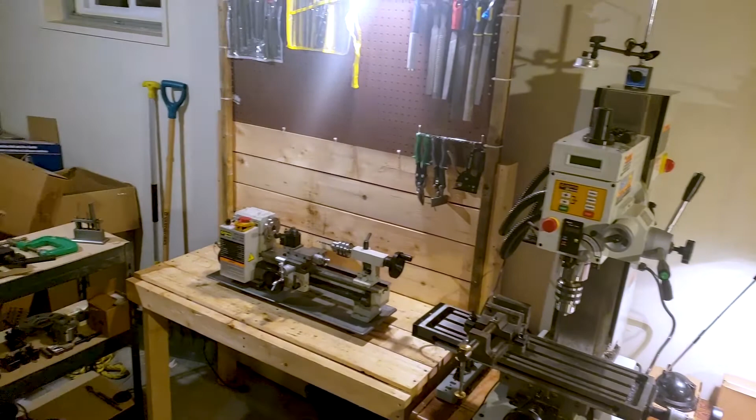Now just a quick overview of everything in the shop. As you can see, I have two milling machines, a lathe, some accessories on that bench there, and over here we have a soldering station, some miscellaneous tools, and my grinders and sanders as well as my vise.

Here we have my first milling machine, which is my Sherline mill. It is very small but also very accurate, and it has a very large selection of accessories for it, most of which are either on the table in front or in those plastic drawers.

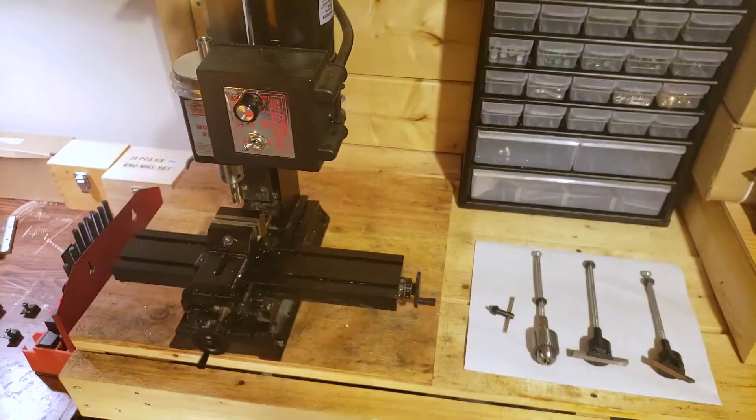A little closer up you can see it really is quite diminutive, but it is really quite amazing. Obviously the table can move both in the X and Y directions, and the spindle can move in the Z direction. You can see that cute little vise there, and you can probably tell how smooth the mechanisms on this are, and there's very little backlash. It has very good compensation.

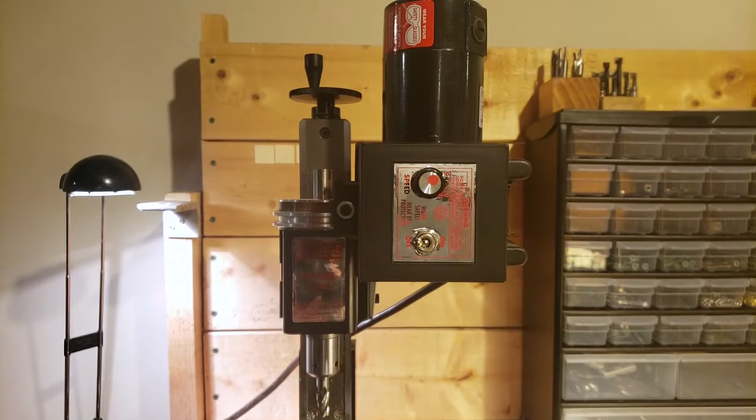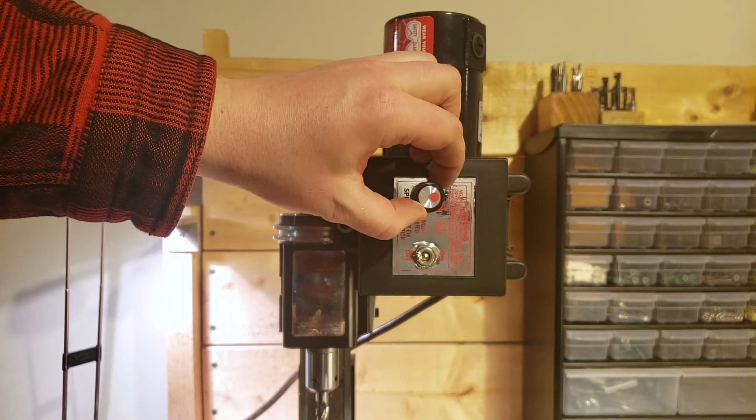Now as I pan up, you can see a closer look at the spindle, drive, and controller. Up there is where we have our Z-axis knob, and it's a little bit of an awkward placement, but given how small the machine is, it's not too bad. The motion is a little sticky on this one because I haven't lubricated it in a while. But as you can see, the controller is very simple, an on-off switch and a continuously variable speed.

Here we've got some of the accessories. You have a Jacobs chuck. That there is actually a gear cutter, which I haven't yet ground into shape yet. And on the far right, we have a fly cutter, which I actually use quite often, believe it or not.

Now we have our larger mill, our big boy. This one is slightly less accurate, or rather, I'm not as good at being accurate with it, but it is very large compared to the Sherline, and that gives it great vibration dampening. It also has a lot more horsepower, so it can make much deeper cuts, and it has a much larger capacity on the table.

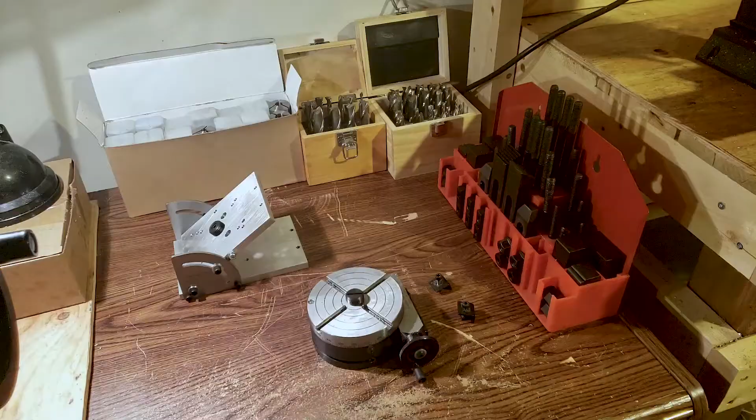Now, as you can see, there's quite a number of accessories with this machine. Over on the right, we have a hold-down kit, which is really quite useful, essential even. I'd say even more essential than a vise, as you can hold pretty much anything down with that. In the center here, we have a rotary table, which is actually intended for the Sherline mill, but you can make it fit on almost anything if you're willing.

Those are just the hold downs for it. And there's something I haven't used yet - it's an angle plate that's for the rotary table, but it's also for the Sherline.

I also have a large number of end mills, both 4-flute and 2-flute. They're very good quality, and right here I've got my collets, which is the primary thing I use to hold my end mills, as they are very accurate and repeatable.

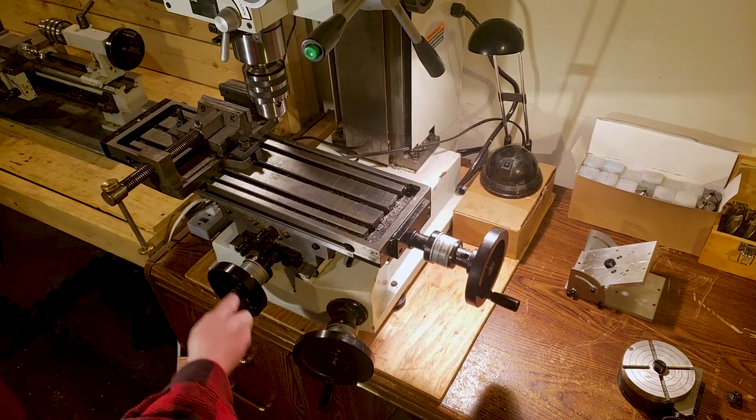Now onto the milling machine itself. As you can see, we have the Z-axis wheel in a very convenient location compared to the Sherline. Some of these larger mills do have the Z-axis wheel on top, but this one has it in a much better location. The X-axis wheel is also capable of freewheeling if necessary, which is useful because you can put an electronic drive on these, and that freewheeling ability will prevent the wheel from smacking you as it spins.

Now the table, of course, has a locking mechanism, as does the spindle, and that is very useful for keeping things rigid. Now the vise that we have mounted on here is actually one that I built myself in college. It's cast iron, and I machined or turned every part of it.

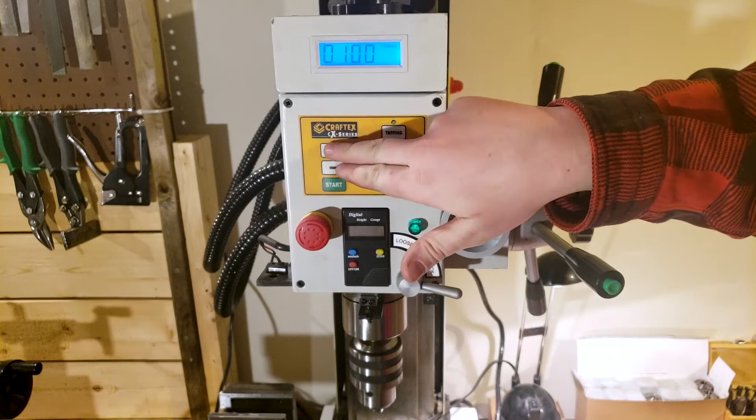Next up, we have a close-up on the spindle and the motor head and all that. As you can see, we have a push-button interface on there and a nice digital display. I can increase or decrease the RPM in increments of 10. I also have a tapping function and a forward-reverse rotation.

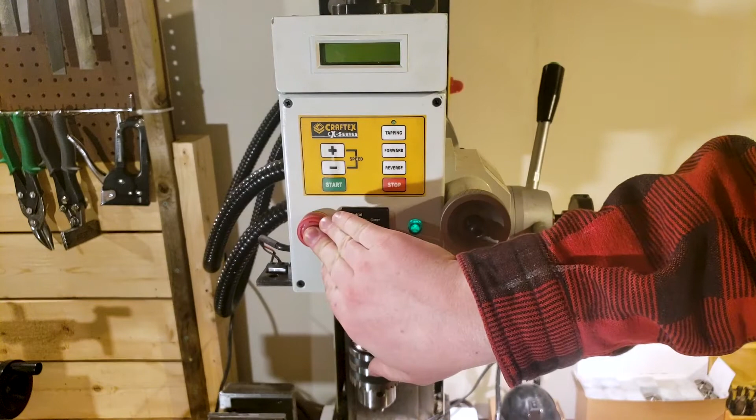As you can see right there, my nice little digital height gauge does nothing because it uses a battery for some reason, and that battery is dead. However, my e-stop works just fine, and when you disengage the e-stop, it powers right back up.

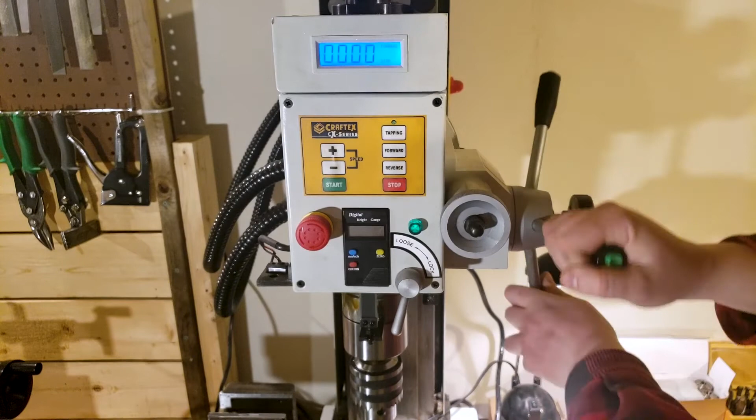Now, given that this is technically a mill drill, that explains why we have the handles here for doing drilling. It is much more stable than a typical drill press, so it's a big advantage there, and you don't need to buy another machine to do your drilling unless you have more than one person working in your shop.

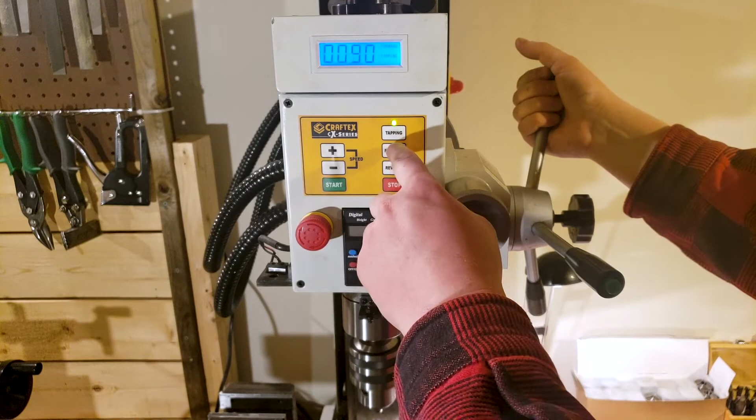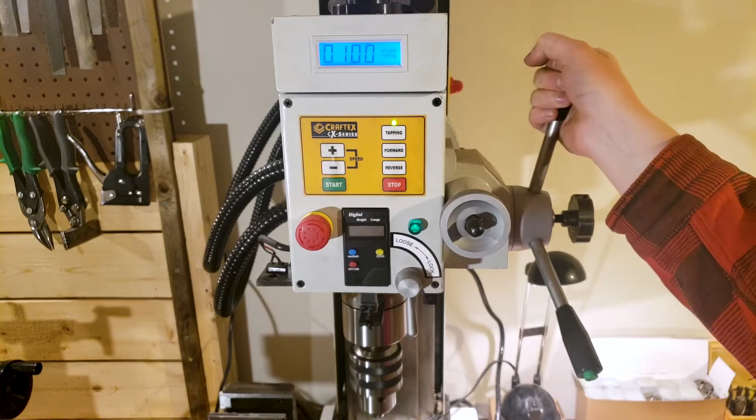Now what I'm doing right now is illustrating the tapping function. It actually has a little button on those handles that lets you reverse the direction of rotation as you are tapping. So when you get to the bottom, you reverse the rotation direction and then pull right back out. It's a very useful function, which I have not used at all yet.

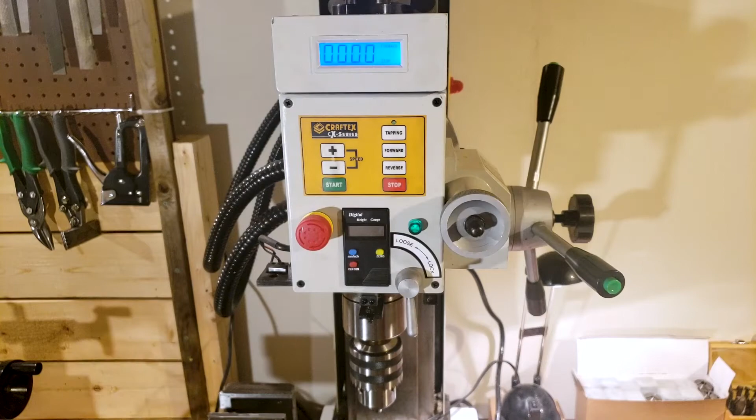Now our next machine is my diminutive little lathe. This poor guy has seen better days and wasn't all that great to begin with, as it is a Chinese import lathe. It's very, very stiff. The cross slide doesn't work very well, and I really need to do quite a bit of refurbishment to it in order to get it to be usable.

It also has a fairly limited capacity. It did the things that I wanted it to do, but I will definitely want to get a larger lathe, as with a chuck and the drill in place there, I have barely more than 6 inches of overall length on the workpiece. Of course, it has an e-stop like everything else except the Sherline. It can go forward and reverse with that switch, and it's continuously variable on the speed. However, it does have change gears, which are actually for the threading function.

Now here we have some accessories for the lathe. We have some wrenches, Allen keys. That green one there is for our carbide inserts. That is a chamfering tool for any holes that we make. And we have some quick change tool holders, which are actually fairly good quality. We also have a center and some jaws for our 3-jaw chuck, which is right there, and a chuck key, of course. And what's in the box there is our 4-jaw independent chuck.

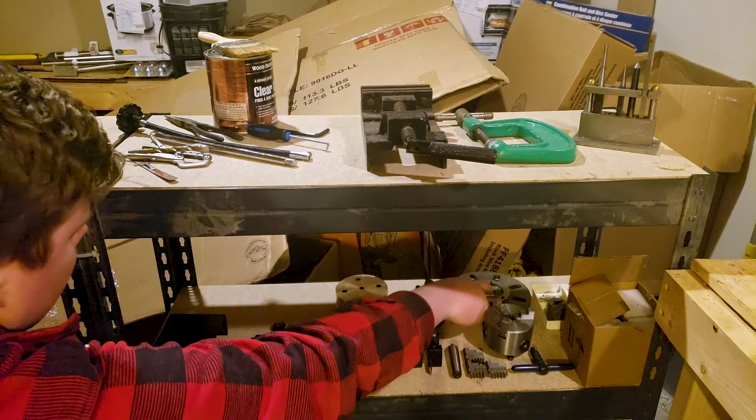And in the back here is something I don't use very often, but when I do, it's quite useful. It's the faceplate. It currently has something super glued to it, which is a completely legitimate way to do things. And what we've got there is our original tool holder and a super glue chuck.

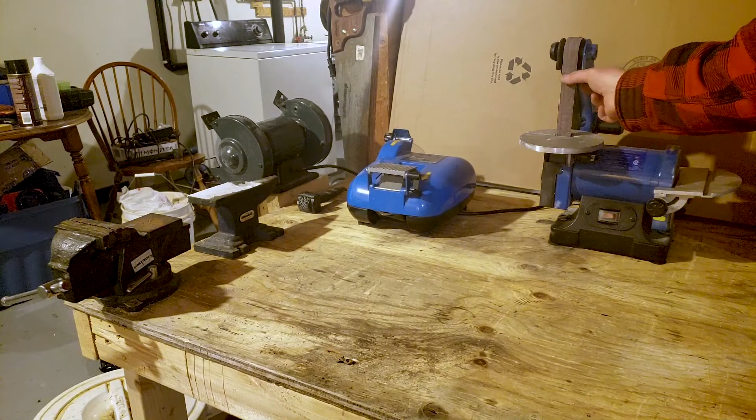Now over here I have my soldering station and a variety of accessories and tools that don't really qualify to go anywhere else. And over here I have the belt sander, a blade sharpening grinder, and I have my pedestal grinder as well.

And we've got a bench vise, as you can see. That is extremely useful, especially when filing things. We've also got a cheap little anvil, which is good for tapping in bearings or tapping out pins. And as I mentioned, the pedestal grinder with the dressing tool to keep it parallel. We've also got a variety of miscellaneous tools on the post there.

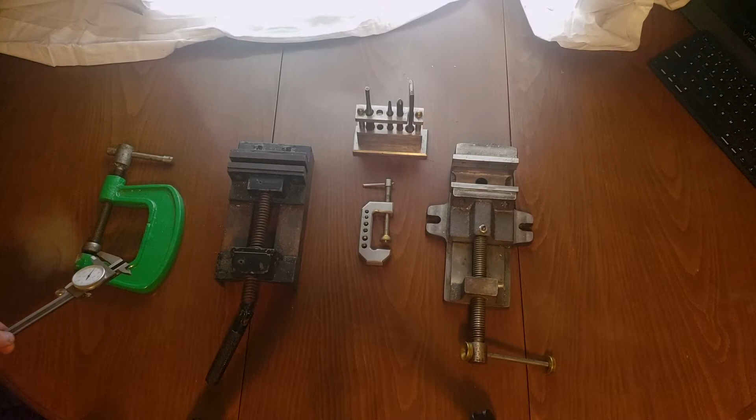Alright, as promised, I'm going to show you some of the projects that I made in high school and in college. On the far left here, starting out right away, we've got the first thing I ever really made out of metal. It's a C-clamp with a body made of sand-cast aluminum, and then powder-coated a nice shade of green.

And then the first thing I ever made on a lathe was this screw here. I was very proud when that actually ended up working. All the other components here were turned on a lathe as well, and then just welded up together. It looks rather rough now, but I learned a lot making this thing, and so I'm glad I made it, and I have used it once in a while since I made it.

The next item I'm a little bit more proud of, though not necessarily proud of the condition it's ended up in, but this was the first vise that I ever made. It's more of a drill press vise or a general purpose vise, as it doesn't have any tabs to mount it to a table like a mill vise would, but it's basically made out of some sturdy angle iron, welded up together as well as could be, and then machined flat along the ways with these jaws machined out of flat stock. And this lead screw here turned, that one is an Acme thread. The other one was a triangle thread, but I believe this is the first Acme thread I actually cut.

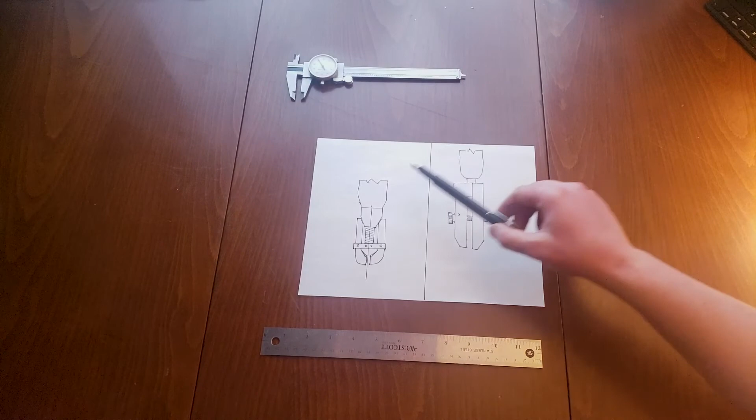And now, finally, as promised, a preview of my next project. I've actually got two different options for this, but they do the same thing. These are both hand vises. They just use a different mechanism. For those of you that don't know what a hand vise is, it is a vise attached to a handle.

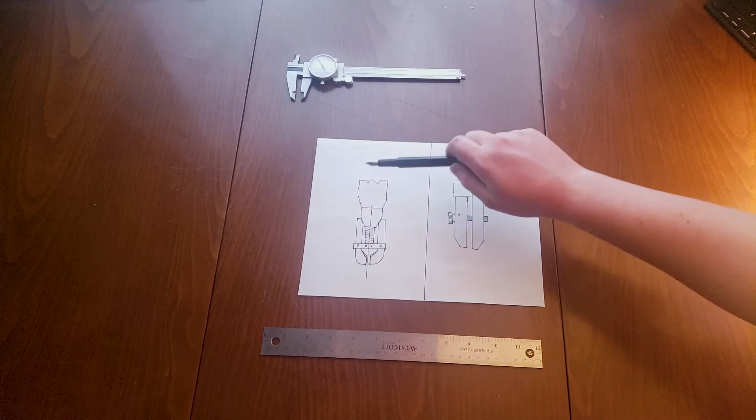I just cut it off here in the drawing so I didn't have to draw the whole thing, but the handle would typically extend to about the size of a typical screwdriver handle. And it essentially allows you to hold very small, awkward objects very securely by hand.

Now, I grind a lot of my own tool bits out of high-speed steel, so that is probably what I will primarily use a hand vise for, especially if I'm making a custom drill bit or reamer out of rod stock. Especially for the really tiny holes, it is extremely difficult to hold on to such a thing securely if you're going to be hand grinding it. So these will be incredibly useful.

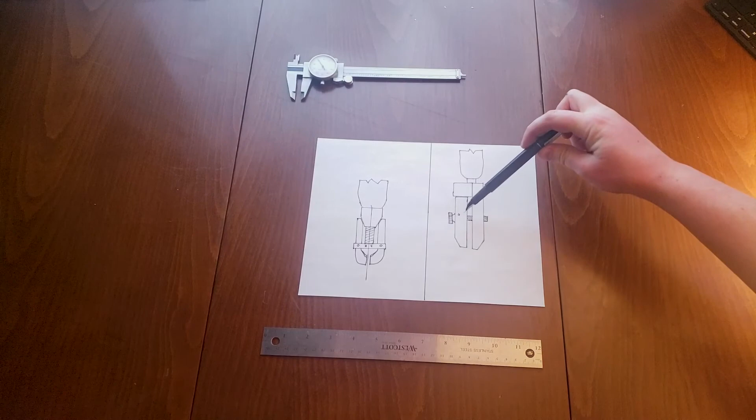Now a little explanation I think is needed for the left-hand one. The right-hand vise is fairly obvious. You have a moving jaw here, you have your threaded rod going through and your knob on the other side. Your rod is fixed to the moving jaw, and it goes through a threaded hole in the fixed jaw, so when you turn this, you can tighten it or loosen it as you wish.

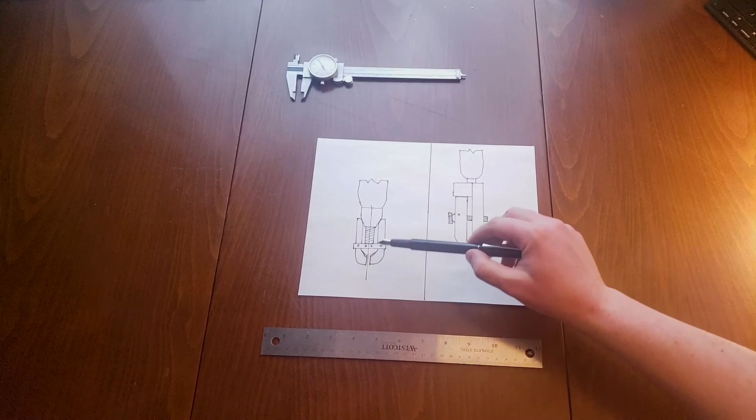I may make that into a hex bolt instead of a knurled nut to allow me to crank down on it a little bit harder. We shall see. But this one is a little bit more complicated and a little bit more elegant looking if you like the aesthetics of a tool.

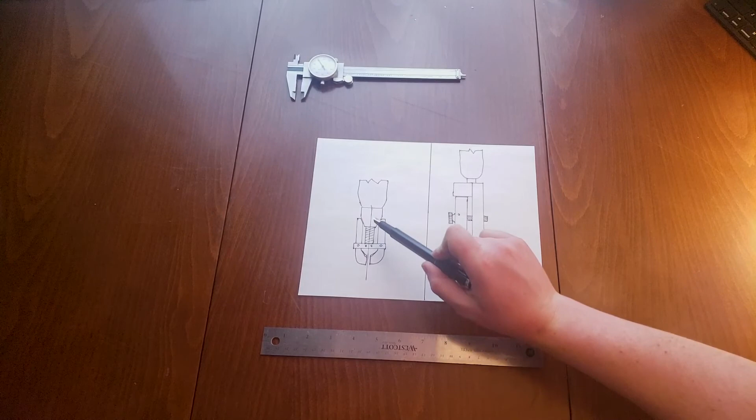So you have your two moving jaws. There's no fixed jaw in this one, and they are connected by a linkage here. And there's a threaded rod that goes through that linkage and is pinned to it. Now that threaded rod goes into a threaded hole in the handle.

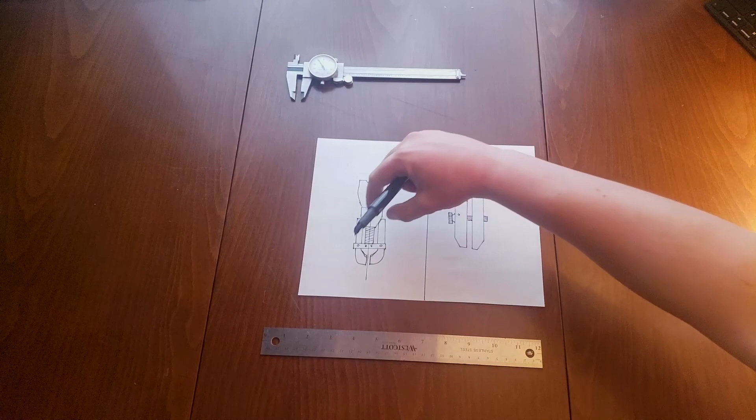And as you can see, there's a cone-shaped item here at the end of the handle, and that, when you screw the threaded portion in by rotating the handle while holding the jaws straight, it will cause these to move apart and these to move closer together, and thus it will grip whatever object you want.

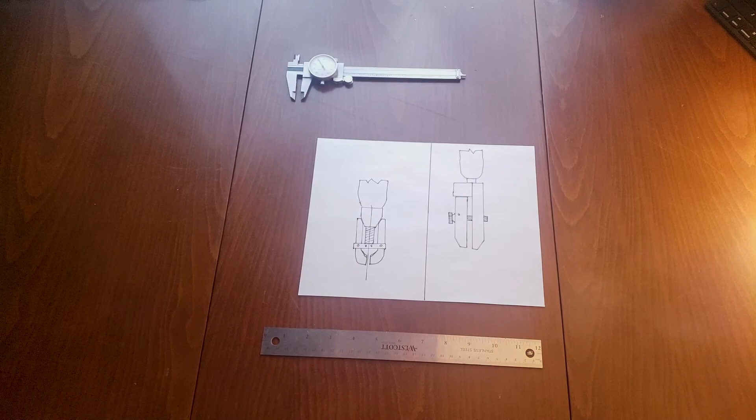Some other people on YouTube have made hand vises like this before, and I really liked the look of them, so I'm going to design and build my own, probably. I might end up making both of these designs eventually, but we shall see. There will be an update on that coming soon, however.